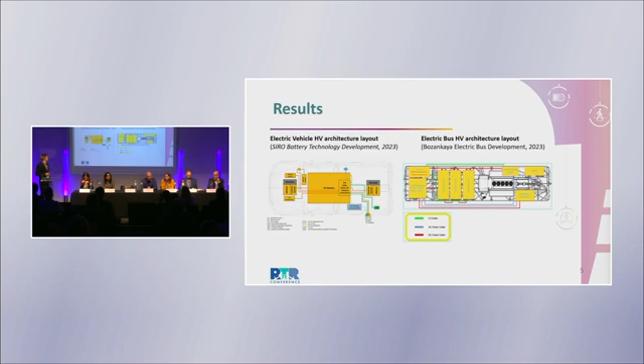I wanted to make it easy because we only have short time, so I will give you an overview of the results. What we first do, of course, when we want to construct our modules for the different use cases, is define a baseline and general requirements. So we looked at different use cases, for example, electric vehicles, electric buses.

Then, of course, we also have to look at the internal components. For example, you can see here for the BMS, the different parts we need, and for the battery thermal management system.

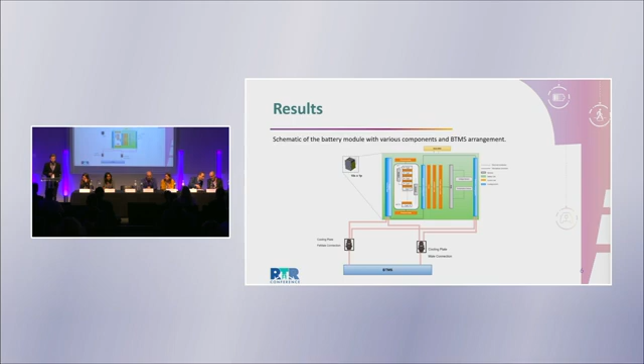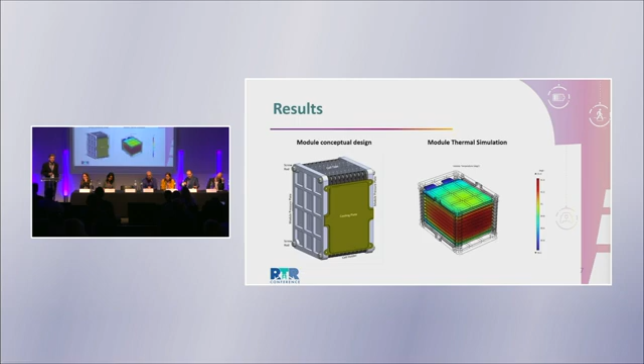At the start of our project, we designed a first conceptual design of the module, which you can see here on the left. And this we will use to characterize this with different thermal simulation and electrical simulation. I just want to give you here some aspects of the different work packages. So it's not only about building these modules, but also to achieve our KPIs.

We looked at different solutions. So one is the electrical solution, which includes wireless communication. So in our different use cases, we will use actually 3 different solutions for electrical monitoring of the cells. One includes the wireless communication, another also includes printed sensors, and one is different in the amount of sensors, also including thermal temperature sensors.

Then other work packages include the electrical characterization of the cell, but also electrical and thermal modeling. So in this case, we really use the data we can get from the characterization of the cell and use it for our modeling system.

And because one of our KPIs is also thermal propagation, we constructed a reduced scale module testing. So of course we don't want to do all the tests on our 3 modules at the end and burn them down. So we built this reduced scale modeling to learn something about the thermal propagation of the cell inside a module. And in this reduced scale module, we also use advanced materials, special heat spreaders, and heat shields.

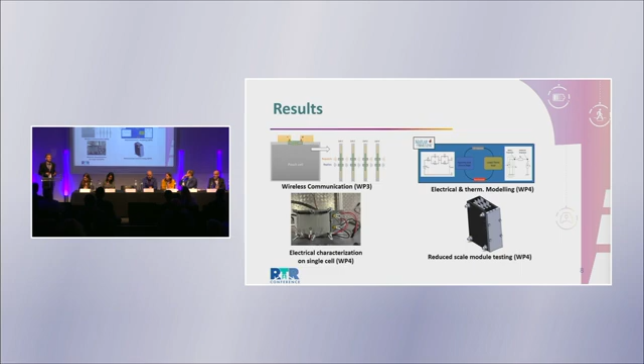Here you can see other aspects of our work packages. So in the last months, we made progress. We updated our design to use more cells. And then we will use this module design to define certain virtual use cases. As I mentioned earlier, we have the 3 use cases for the modules, and these use cases are connected to energy storage, EV, and also buses. So there we discuss this by virtual use cases. We also performed abuse tests on the cell, which we will use for our modeling.

And another work package is the identification of the key exploitable results. So as mentioned today, in the innovation chain we have the 3 pillars. So actually we use a technology from pillar 1, which is semi-solid state batteries, and we go into pillar 2, and we also want to know what is needed to bring the TRL level at the end of the project to higher TRL levels. And that's why we identified key exploitable results which are important in our project, which we then discuss in detail.

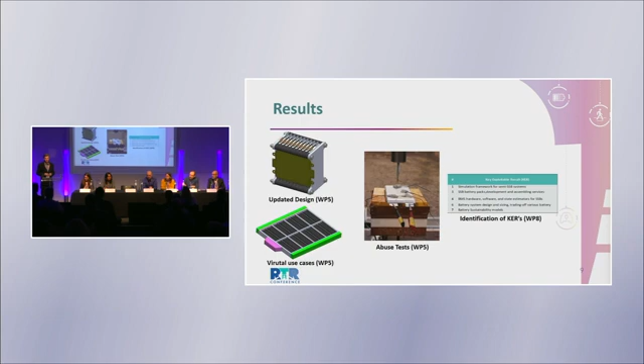Another work package is, as I mentioned at the beginning, we don't only want to build the modules and estimate the parameters of the use cases, but we also want to know about manufacturing cost, recycling, and that's why the LDF-X methodology was developed, which is in fact a life cycle assessment study in which we will bring information from our project. This will also be compared to literature values, and we will also bring use cases from our industrial partners. So from BMZ, we will give an E-bus use case, which we will compare here to show that this approach with our modules has high recyclability and good dismantling properties.

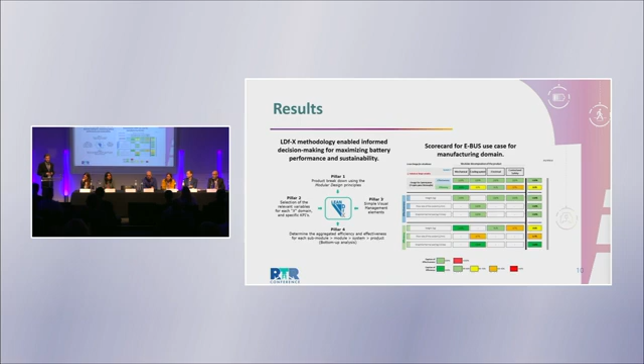Okay, then I already come to the mid and long-term expected impacts of the project. So what is yet to come? Our goal is to build the 3 demonstrators for the 3 different use cases. We will use different materials which are suitable for the different use cases. We will apply different workloads connected to the different use cases, and then we can test our modules. Another goal of ours is to have 3 workshops, which are all planned for this year, and this is yet to come.

And the last aspect is what is important here for the EU, how to disrupt. So we want to further optimize the semi-solid state battery system, but also the solid state battery, which we had at the beginning. As I see the project, it's also an important task to show what are the benefits and drawbacks of solid state battery technology and compare this to lithium-ion, but also semi-solid battery systems for the different applications.

We want to evaluate how we can scale up the capacity of manufacturing. And this will be one of the big challenges. Of course, we can also do this only virtually and by this life cycle assessment. And then we want to develop sustainable recycling and second life solutions for semi-solid state batteries.

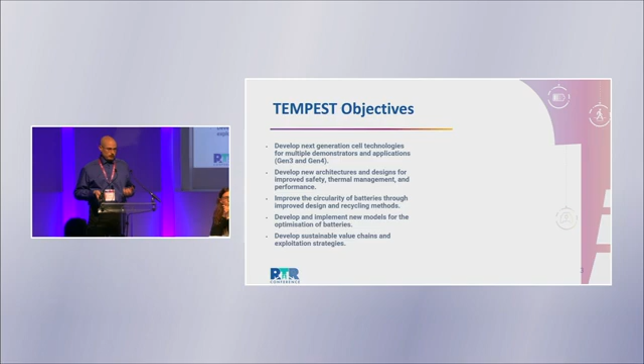Again, we want new architectures so that we can optimize space and weight, but also to improve circularity through better methods for assembling and disassembling at end of life, recycling the materials, recovering the metals, recovering the graphite and reusing it, and using new models to optimize the performance and the mechanical behavior of the batteries, and finally to develop sustainable value chains.

And one of the things I want to point out about this project is we are unique amongst the projects presented today in that we use composite housings. And this itself has been one of the challenges, but also one of the technological opportunities here.

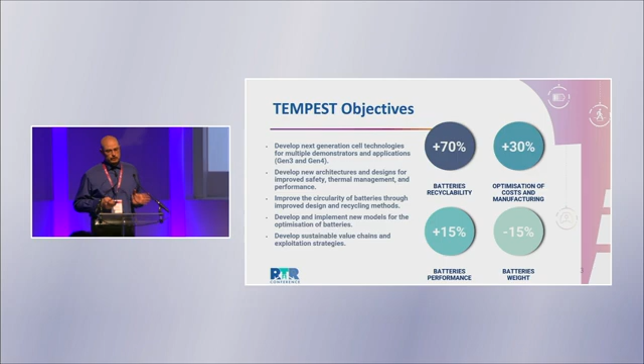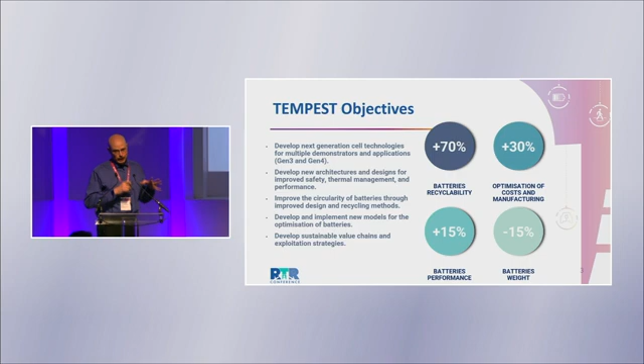So our overall goal is to achieve at least 70% recyclability in the batteries. We want to reduce the cost of manufacturing by about 30%, increase the performance by about 15%, and reduce the weight of the overall pack by about 15%. For this latter point, we have already been able to demonstrate, at least in the gravimetric cell to pack ratio, that we've completely exploded that. We're at around 80% now. And that is simply by shifting from aluminum or steel housings to composites; we have been able to dramatically reduce the weight.

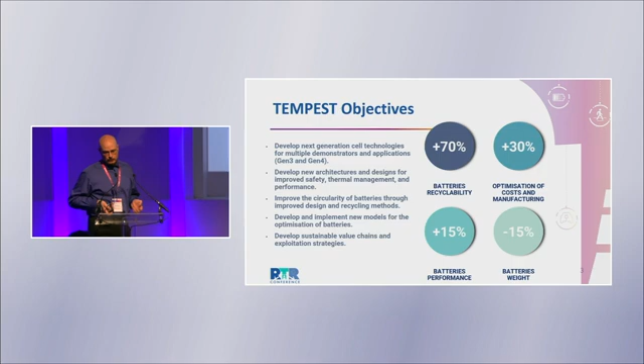So, first of all, in the results, I'll briefly introduce to you the different types of cells we're using. You can see that we have Gen 3 and Gen 4 in here, and we have already started testing and evaluating the cells to establish essentially the data baseline for everything else that will be done. Now, as I pointed out, we have composite systems. These composite systems behave differently from what everybody accepts for how a metal housing is going to behave: crash resistance, corrosion resistance.

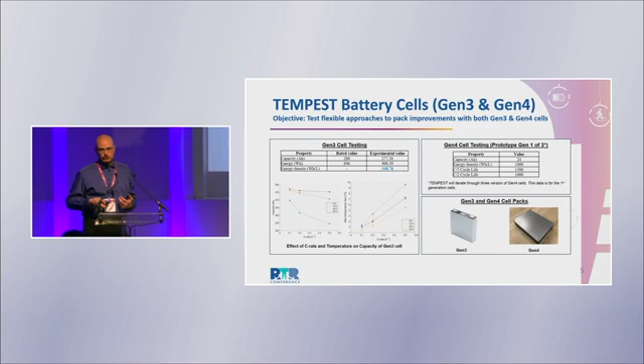A lot of these things change dramatically, especially since we're using composites. So you have to consider, how is this going to behave when it's in somebody's car? So one of the things that we're implementing is a structural health monitoring system.

The structural health monitoring system will continuously monitor the composite system, detect if there is a fissure, and essentially communicate back to the battery management system to tell, for example, the driver of a car, oh, you've got a problem, you need to get it to the service station as soon as possible. So this is a guided wave system that is currently under development.

These are our preliminary results, and what I will point out is that they are currently being refined and optimized to improve the detection accuracy. But the point is, we already have a solid proof of concept to show that we can detect defects, okay? And this will be completely integrated into the pack system at the end of the project.

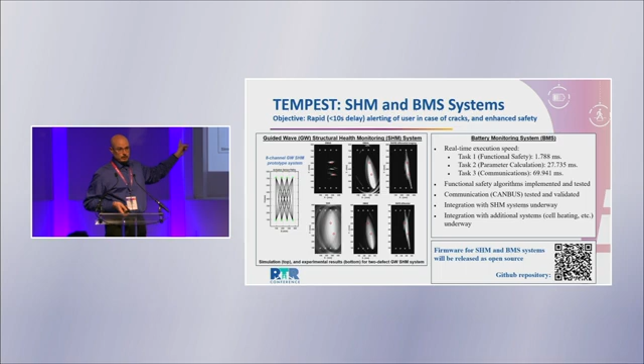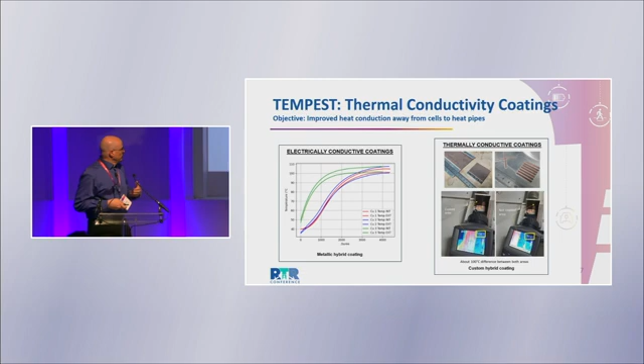The other thing I want to point out is that one of the goals is to be as open as possible. So the firmware for this SHM system, as well as the BMS, will be open sourced, and it will be available soon. One of the other things we want to address is improving thermal management. So we're developing thermally conductive coatings for assisting in transferring heat from the cells to the cooling system. These are deposited by cold spray. These are the prototypes that we have right now.

In addition, we're looking at physical and thermal protection. So first of all, we've done modeling already to evaluate impact resistance of the housing to impacts such as rocks from the bottom. We've also done modeling to set the computational baseline for, for example, the impact of a pole or some other large object against the housing. To complement this, we are working on impact and abrasion-resistant coatings to go onto the packs.

In addition, fire is always a significant issue. So to help address this, we are developing two different types of coatings in the project. The first one is a fireproofing coating for the inside to essentially auto-extinguish any cell fires as they occur. It's a one-time use coating, but it's something that we're currently developing.

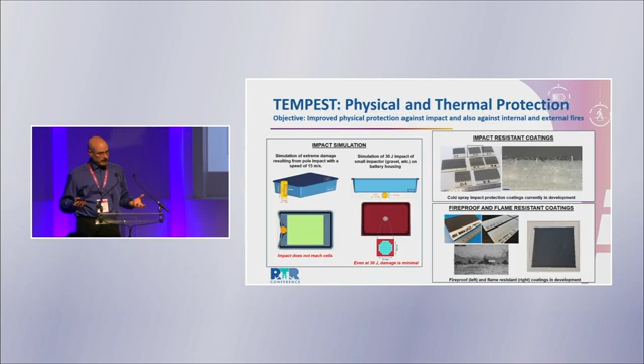The second one is a flame-resistant coating, which is designed to protect the outside. Say, for example, there is a fuel leak in a crash. There's a fire. Basically, what it will do is swell up and protect the housing. So it'll give it that much more time to resist the heat.

We are also looking at circularity. One of the things that's also important is at end of life, how do you address this? First of all, through using these composites, we're going towards a composite formulation that is by design more recyclable. Second, we're using debonding on command adhesives, which once they're deposited have a very strong strength. But at end of life, simply through the application of heat, they become very easy to debond. You can basically just pull them apart.

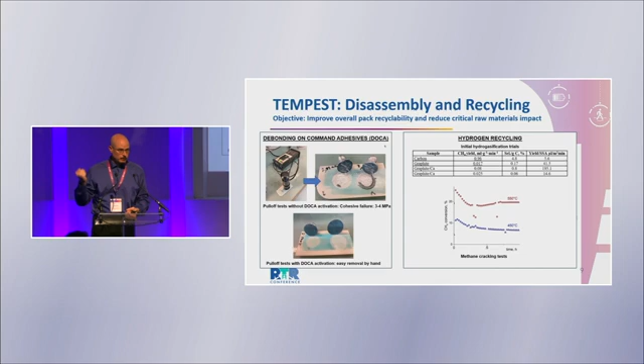Once you've got these apart, the most important thing, the critical raw materials aspect, is something that needs to be addressed. And that is the next thing we are addressing, through methods developed by the National Institute of Chemistry. We are looking at methods for using hydrogen routes to both recover and transform the graphite, as well as to recover the metals. So the idea here is to have a circular pipeline for recovering the materials at end of life.

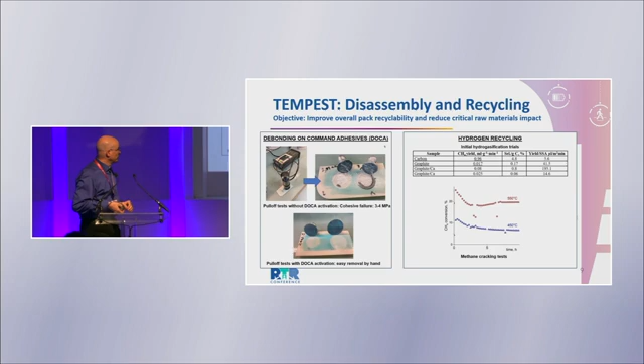So what are the mid to long-term expected impacts? Well, there's a lot to unpack here. First of all, we want to address the volumetric cell-to-pack ratio and the gravimetric cell-to-pack ratio. Now, the volumetric cell-to-pack ratio you can improve simply by getting rid of modules. That's one of the easiest approaches. And so we're using a cell-to-pack approach to address that.

Second, the gravimetric cell-to-pack ratio. That's commonly one of the more difficult areas to address. In this project, as I said, we've addressed it in large part through moving towards composites. That's given us a huge boost in weight savings.

I haven't talked about it here because we haven't gotten to it yet in the project, but we are going to develop a system called energy storage as a service. I'm not going to go over it in detail here because it will take me a while to explain. But the basic concept is to introduce new economic models for the supply, the use, and the recovery, and essentially develop a circular economic model to encourage both manufacturers and users to participate.

We are also going to engage further with the JRC to help work on developing new standards, work on new policy. And we are also in the process of developing training programs for upskilling. And as mentioned before, I'm the chair of the EU Ingenious Cluster, so I will be happy to address any questions for that. And finally, I want to talk about circularity.

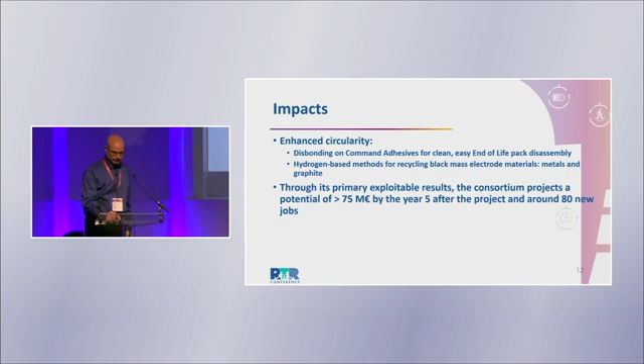Thank you very much, Jeremy. I have to put down, I'm a bit shorter than you.

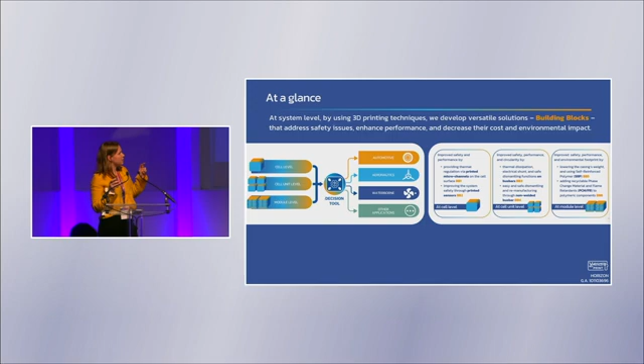And a bit more in detail, today I will not present you all of the building blocks. When it's called BB, it's building block. I will present you just some of them where we have interesting results. So at cell level, just around the cell, we develop the building block 1, that is microchannels for an efficient thermal management and to cool down efficiently the cell.

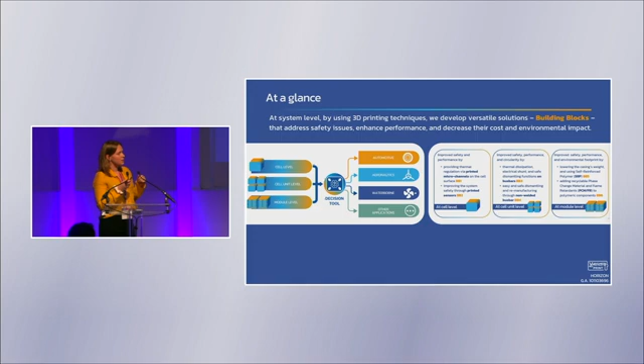And we 3D print this cold plate in silicone directly at the surface of the cell. I will also present you the building block 2, that are sensors that we also would like to print directly at the surface of the cell to sense temperature and detect hydrogen.

At cell units level, it means to connect different cells together. We mainly worked on bus bars. And I will present you some interesting bus bars that we developed, non-welded, that are easy to assemble and disassemble. And at module level, we work on lightweight material for the casing and also on an exhaust gas management system to drive the particles and the gas out when there is a thermal runaway event.

Here you can see the KPIs, so the objectives we have in our project, and you can see that they all target and try to answer the challenges that batteries are facing today. So they are aiming at increasing the safety. We have talked about it before, that we have problems with thermal runaways, for example. So we do have technologies that try to increase safety, to increase performance, to increase lifetime, and the circularity, working on sustainability of the technologies we develop, while trying as much as possible to reduce the cost.

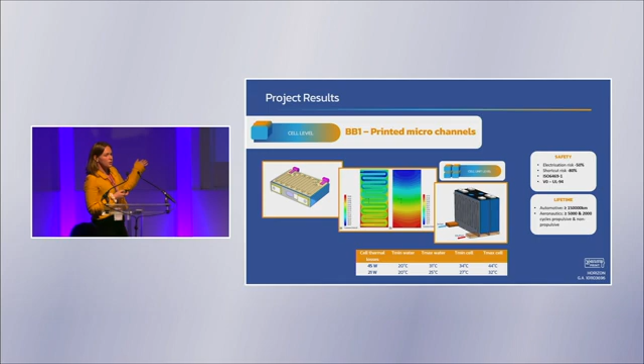Now, going into the details and the results we can present you today after 18 months. We developed, as I said, the building block 1, that are microchannels that you can see here on the left. It's a silicone plate that we 3D print directly at the surface of the cell, and that cools down very efficiently the cell. And what is interesting to see, here you can see the thermal losses at 1C and 3C, so with heat generated, and we can see that we are keeping the cell at a very nice low temperature.

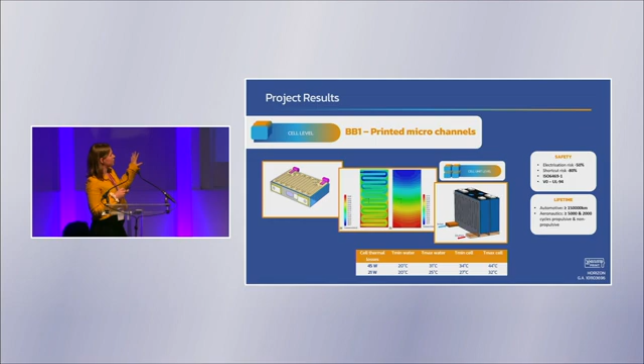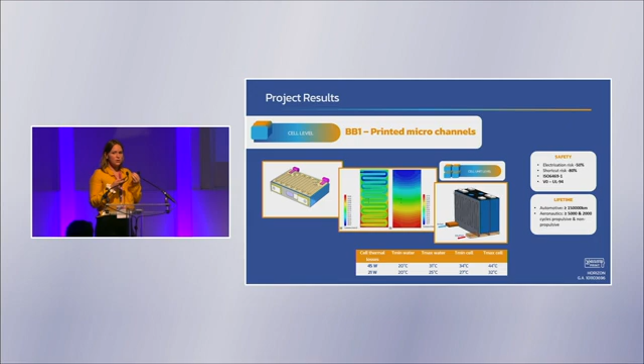And these building blocks will have an impact, so increase the safety, because it will delay the thermal runaway event by cooling down efficiently the cell. And it will also have an impact on the lifetime, because the conditions around the cell, so the temperature, the pressure, and other conditions, have an impact on the lifetime of the battery. So it increases the performance and the circularity.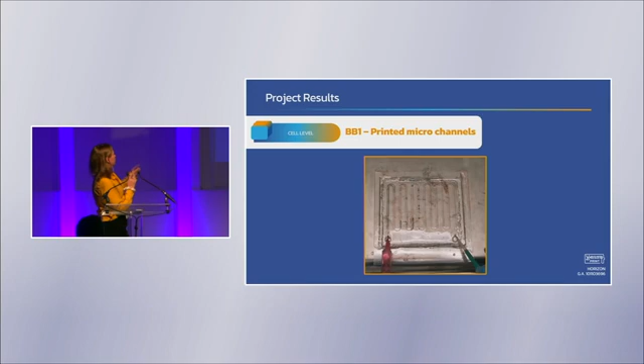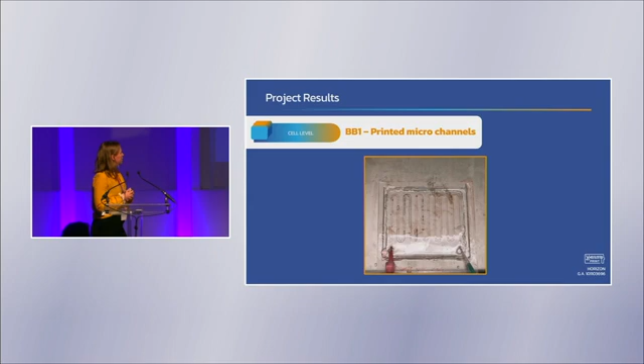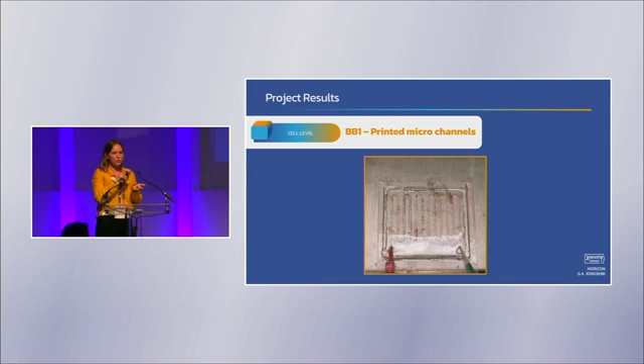Okay, it's starting already. So it was actually a few months ago, so now it's much more optimized than this, but it's to show very quickly the fluid that is circulating very nicely with no losses, no mechanical losses during the flowing of the fluid. And this we will print. We are actually printing right now directly at the surface of the cell.

The second building block I am sharing with you is the sensors. So these two sensors have been developed, are still being developed in the project. They are having an impact on the safety, because we want to prevent thermal runaway or to detect it. So the first one detects the temperature directly on the cell, and the second one is to detect hydrogen, which is a gas that is produced when there is a thermal runaway event. And both these sensors have been developed with water-based inks that make them more sustainable than commercial sensors.

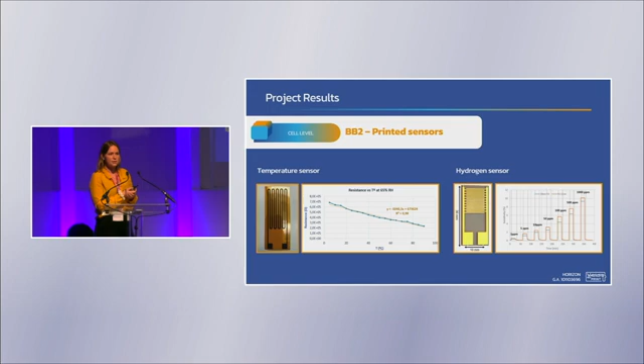We can see for both of them a nice linear answer. So for the temperature, we can see a linear decrease with a nice slope that makes the sensor sensitive in a range of temperature of 0 to 100 degrees, but we do face challenges. We are still working on it. We face challenges in the negative temperatures. And for the hydrogen sensors, we can detect very low amounts of hydrogen, so it's very precise. And we are also still working on it because we face challenges here in the response time.

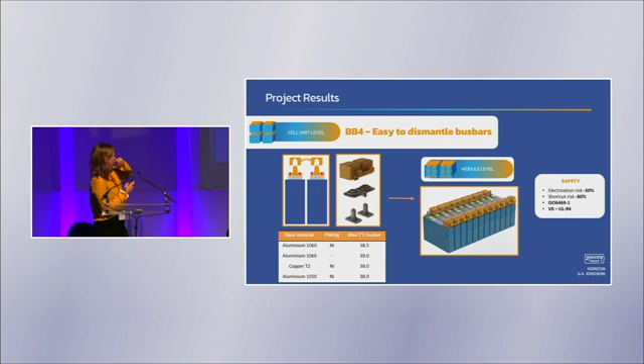And another building block, at cell unit level, it means when we connect cells together, it's building block 4. So that is an easy to dismantle bus bar that is non-welded. So you can see the principle of this bus bar on the left here. We have this lower part that we weld directly on the cell, and then we only have to connect and clip the two higher parts on top of this welded part to connect the cells together.

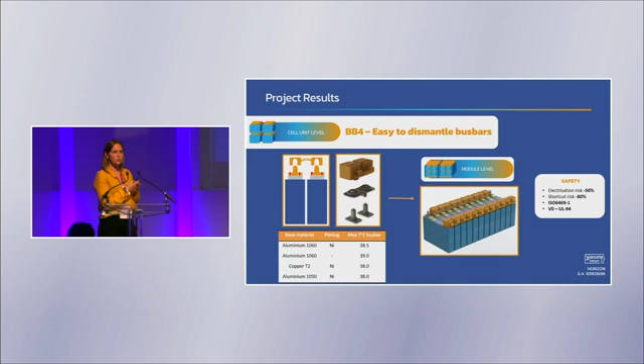And the last building block I'm showing you today is building block 7, which is at module level. Considering, for example, the left scheme, you can see 12 cells together. It's a system that connects all the exits of the cells so that when there is a thermal runaway event, it collects the particles and the gas that come from the thermal runaway and drives them out of the system in a precise location, while also reducing the temperature of the exhausted gas and filtering the particles.

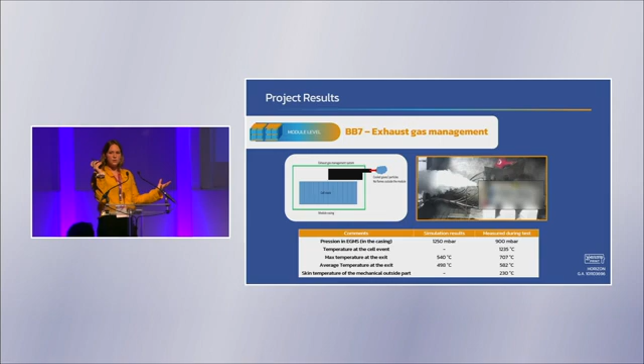And this can prevent the gas mix that comes out from catching fire. You can see on the right the test we performed by overheating a cell. You can see the heat gun, and you can see the gas coming out in a precise location. So the gas didn't come out anywhere in the casing, but was driven to a precise location outside safely. You can also see that it doesn't catch fire, thanks to the pre-filtration of the particles inside the system.

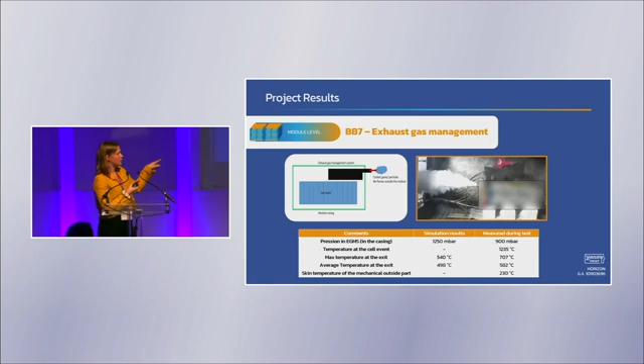And what is interesting to see in the results here is that the measured temperature at the cell where the thermal runaway happened was 1,200 degrees, and the temperature of the gas that came out was divided by 2, so 600 degrees. We actually have even better results now, but it's already a very promising result.

Now, all these building blocks and technologies we are developing in VERSAPRINT are answering the targeted objectives of the European Circular Economy Action Plan of 2020. Mainly, we are trying to increase the lifetime, to reuse, and to make it easy to disassemble and assemble, so to ease the processes at all phases of the technologies. We are also working on eco-design to lower the environmental impact of our technologies. I will show you a little more about this in a second.

VERSAPRINT also contributes to implementing the conclusions of the European Council, mainly developing versatile solutions, as I said in the beginning, for different transport applications. So we will be able to use different technologies for different applications. Also decreasing fossil dependency, improving health conditions, and increasing performance and safety while reducing costs.

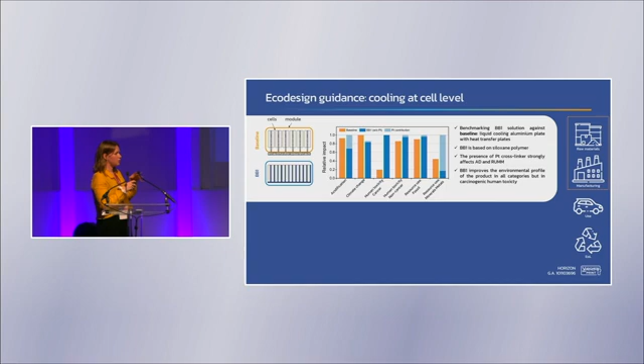And I'm happy to share one result with you. We obtained more, but due to the time restriction today, I'll just show you an example for building block 1, the silicone cold plate that we 3D print on the cell surface. We compared it with a classic metallic cold plate, in orange, and the building block 1 we developed is in blue. Here I show you life cycle analysis results only for the production phase, so raw materials and manufacturing.

What we can see is that we don't have better results compared to a classic solution for the production phase. It's also interesting to see that we have a big impact in the stripes here, which show the platinum contribution. In the silicone we used, a very small amount of platinum was used to make the silicone, but it actually has a big environmental impact. So we need to find another process for the silicone we are using.

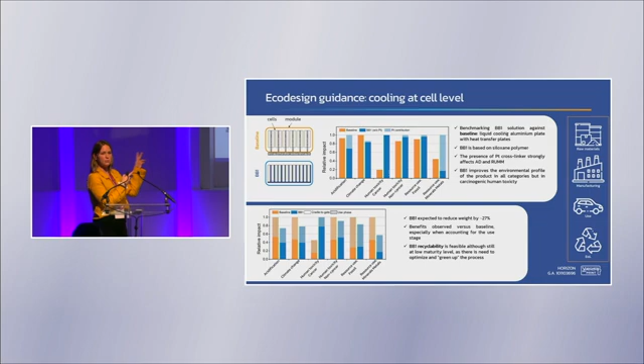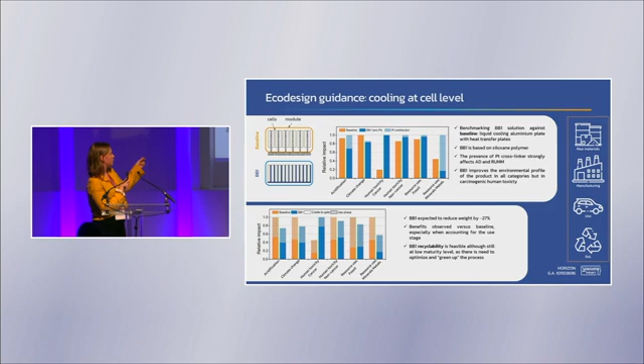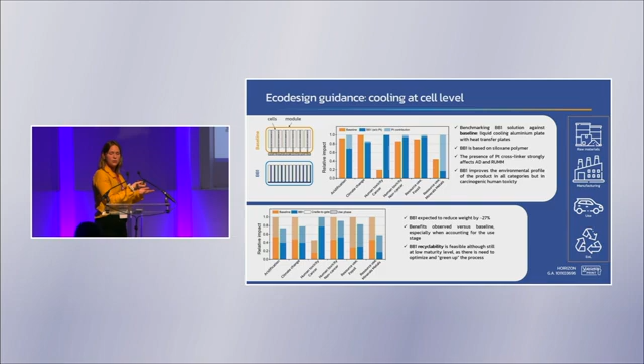But when we take the use phase and end-of-life phases into consideration, not only production, we account for the weight reduction compared to a classic solution. We have a lightweight material, so less consumption and less environmental impact. And this is what we see in the results: for some of the impact categories, we see lower environmental impact for our technology. We have done this for all the technologies we developed, to assess them and try to make them better than classic commercial solutions.

I have other results. If you want to talk about them, don't hesitate to come to me, and I will jump to the conclusion.

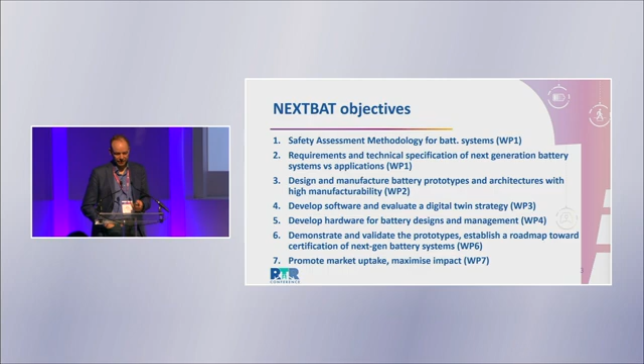Number 5, hardware for battery designs and management. I'll get back to that with a bit more details on the hardware. Demonstration, validation of the prototypes, and through the prototypes also the design approaches, architectures, concepts that we're working with. And of course, lastly, promote the market uptake, look into the diffusion paths, how the bigger picture looks in terms of batteries being deployed into various segments. So that's the setting. And now let's just delve into some of the highlights or the chosen results where we stand at the moment.

We set out to look into technology from the battery cell, being, of course, a key component of any battery system. So we need to understand sourcing cells, analyzing cells from the market. We were aiming at solid-state battery packs or modules, struggled a bit to find solid-state batteries from the market, and I think this has become quite clear for many actors here. So we made a compromise, as we heard also, using semi-solid-state cells, and this is kind of in between there. We want to push the specific energy towards 300 watt-hours per kg at system level later on. We will not reach that in NEXTBAT here, but we still want to analyze what that kind of technology will mean from the battery system level side.

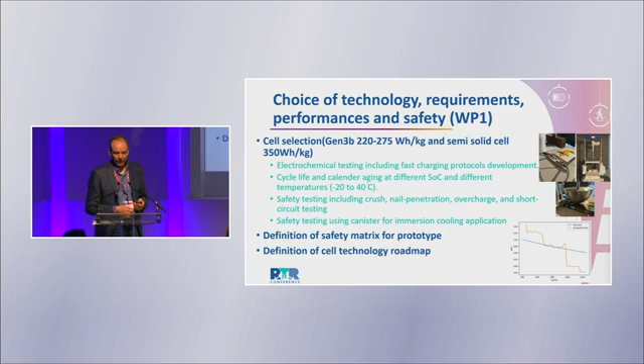So there was generation 3B, more or less in the domain where the technology is at the moment, and 350 watt-hours per kg is the semi-solid cell track for the prototypes aiming at higher energy density. So we've done various electrochemical testing, fast charging, cycle life, calendar life, aging, various types of quite standard testing. Safety testing at cell level, I'll get back to that a bit later in the slide deck. Safety testing with a canister. We're working on immersion cooling at the second prototyping track, a bit more on that shortly. Safety matrix for testing. Now we work at the cell level, but later on the safety validation and testing will be pushed up to module level. And then the cell technology roadmap, as we know that there will be a lot of developments coming up.

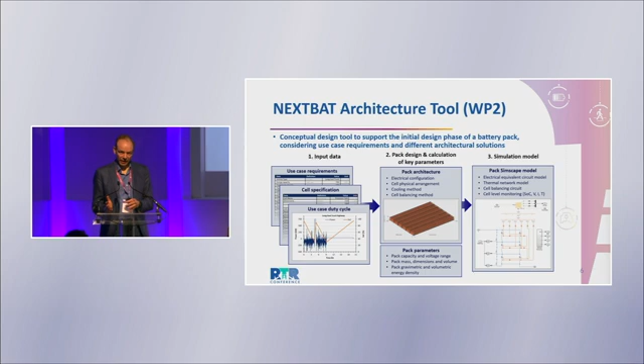Another big one, from another work package here, starting top down on design tools, how to approach the system architecture, system layouts, and there will be various combinations of these. So we have put up a library of duty cycles from the different types of road vehicles and others, conceptual design tools to take into account thermal design aspects, electrical architecture aspects, cell performance, duty cycles, and various configurations. Excluding mechanics, because we are not reaching TRL5 to really do mechanical packaging of packs. But this gives us a solid background to really work around the different concepts for technology and systems, and also place the different innovations that we're working with into the analysis framework.

A bit more on the prototypes. As said, 2 prototyping tracks. One aiming at high energy, so using the semi-solid state cells. Let's see how to get back here. This one, good. This is for prototype 1. It's not a design-frozen module yet, so we'll stay at module level, 48 volts, 14 cells in series, 1 in parallel.

Packing of those, liquid cooling, BMS, and then packaging that at the module level, whereas prototype 2, we push the power density to a higher level, and including two innovations here. One is the immersion cooling system.

So what is not shown here, we're also working on the casing because we need a pressurized system, and it's also fiber-reinforced plastics combined with joining with aluminum, and I think then the reference will be maybe a steel casing or aluminum casing there. So that's the weight reduction element there.

A second innovation there will be cell level monitoring, EIS, for advanced diagnostics to really work on safety related state of temperature, for example. And then we have a maximum effective thermal management system to control that and really to be safe, not to run over into the thermal runaway side.

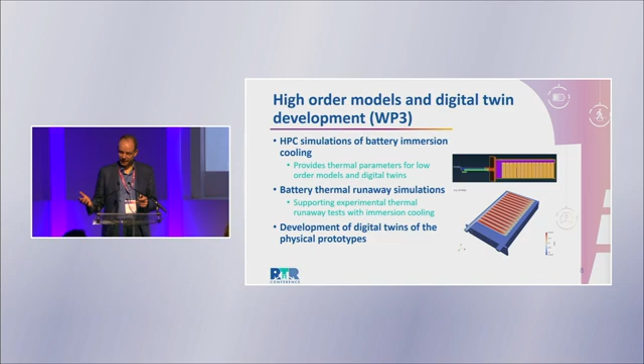We also have a number of physics-based models training AI surrogate models for cells for performance degradation and so on, and that also will be leading, once the final design of the prototypes is fixed, to digital twinning of those and matching that with the test sequences, validation sequences, both normal operation and then the safety.

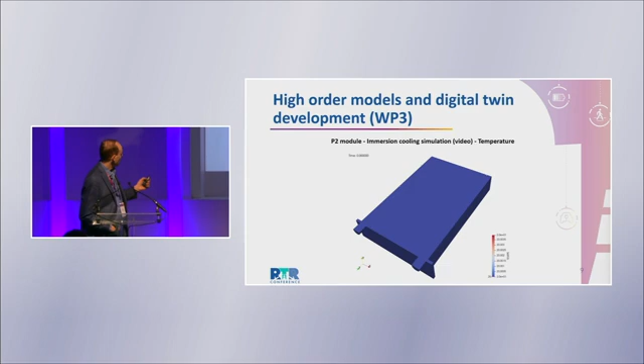And now let's see how the, it's a simulation video here. I'm not completely sure how to start it. Yeah, it does. So just showing this is prototype 2 and seeing a sequence of the thermal flow and how the temperature gradients develop as part of the design space.

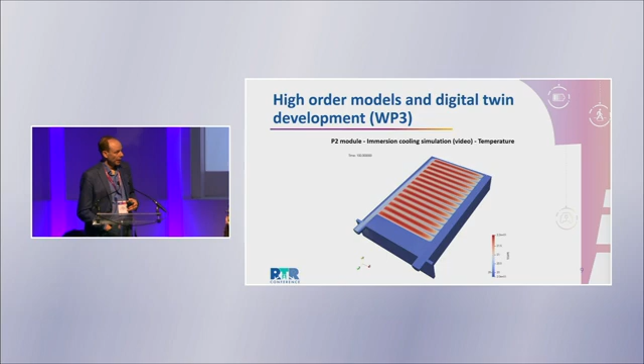We also have done a sub-element like cell level simulation, choosing the dielectric oil and some of the elements there. And I think this is done. There's another one, fluid velocity, that was the temperature first. So this is also validating at this stage when we're finalizing the designs of both prototypes. This is on P2 on the thermal side.

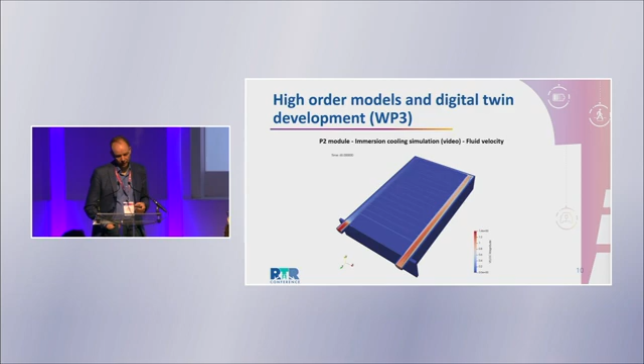I believe it's maybe, yeah.

Just a couple of words on the cell testing. So I started with the cell selection. We've looked into available cells, and we'll be following the roadmap type of approach later on, as part of the comprehensive safety approach. There's an inherent safety of the cells. Then there are intermediate subcomponents like thermal barriers, thermal management, and the management system as a whole, and then the structural elements and so on. So this is part of the inherent part, internal of the cells.

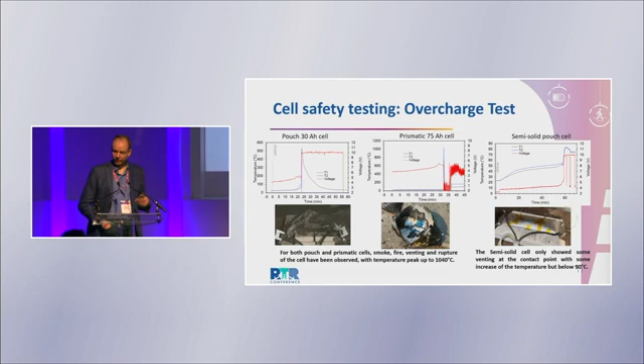So we've done destructive testing on all of the cells that have been in the matrix for screening. And later on, when the prototypes, 2 of each design, will be manufactured, they will also go to the safety validation and testing during the second period here. And then this is the last result I picked up.

We're working on the battery passport, like usage analysis, and this is also supporting the LCA, life cycle assessment, life cycle cost analysis. So using the recently published regulation or standard on the battery passport, how to utilize the data,

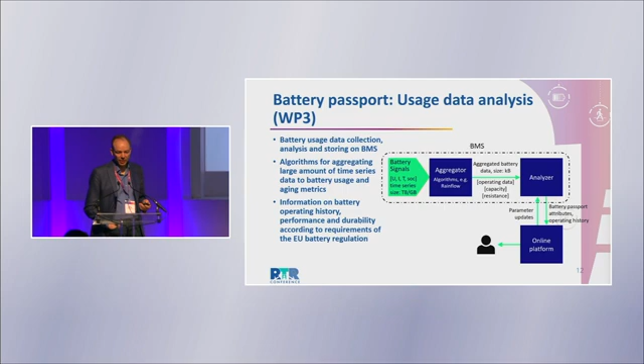and this is linked into usage profiles, and also we expect with the digital twinning and the laboratory experiments really to bring specific information and interface this also with the BMS, which is of course an integral element of the safety approach as such. Just a couple of words to conclude here on the impact side.

A funnel to create impact. This is also our internal process that we follow, identifying the key results. Of course, this is what each partner in the consortium is working on. Right now, we look internally into the business innovation potential, and later on this will lead to the business plan and also creating the individual exploitation tracks.

And currently, as said, we are more or less, as we delve deeper still into the actual innovations that we work with, charting out the individual tracks. And then on the mid and longer term benefits, contributions to EU policy and so on.

So of course it will build on the tangible results, outcomes, exploitable results, and then contributing to the roadmaps, creation of a longer time view, advance in safe battery technologies, and specifically bringing the innovations towards the more application-oriented higher TRL work.

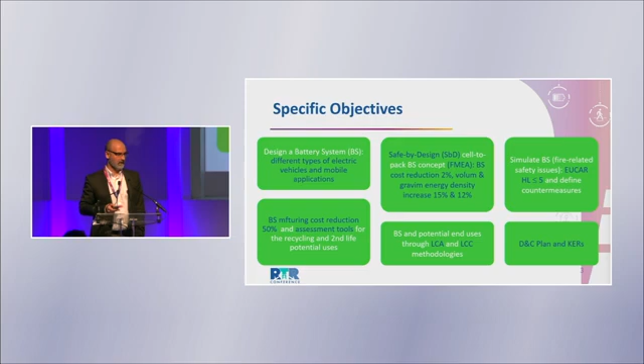So regarding results, I just focus on the results where we have some progress that we can show. As I said, we have just started 1 year ago. So the first challenge was to define even the drive cycle, because in the automotive sector we have the WLTC, formerly we had the NEDC, but in these segments, off-road, maritime, and Second Life, there is no specific standard profile so that it could be compared.

And this was something that was also highlighted in the workshop, that, by the way, I highlighted there. We collaborated thanks to the EU Ingenious cluster together with the JRC, BEPA, and 2Zero. And in that workshop, one of the things that was highlighted is this lack of information or guidelines for this, as well as guidelines about safety and about abusive tests to be applied to this kind of vehicles.

I take this chance to remember that here we will try to do some standardization activity on these fields, drive cycles, safety means that we are introducing in the design, and that is why we participated in this workshop, and we are also in contact with the EARPA.

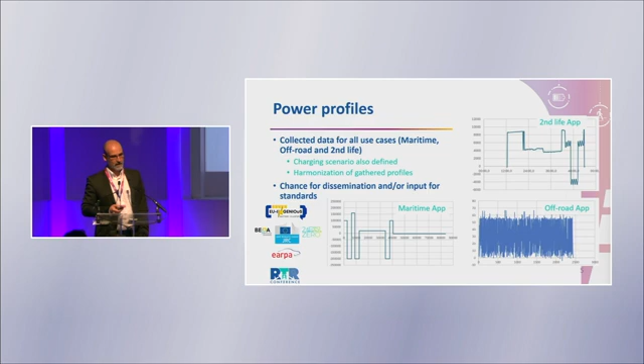Another result is based on impedance spectroscopy, which we are trying to use to assess the quality of the weldings between the bus bars and the cells. I did not mention it, but you will see in the pictures that this project is about cylindrical cells. 21700 was the baseline defined by MIBA battery system, but this project is about 4695 cells, these thicker ones. And the technology, by the way, is advanced NMC.

So here we realized that with some samples related to the 21700 thin bus bars, we could not see any difference between a high quality welding and a bad welding. But in December, when we started to create samples of the new bus bars for the higher current of these 4695 cells, we could use it as an element to assess the welding of this bus bar and cell.

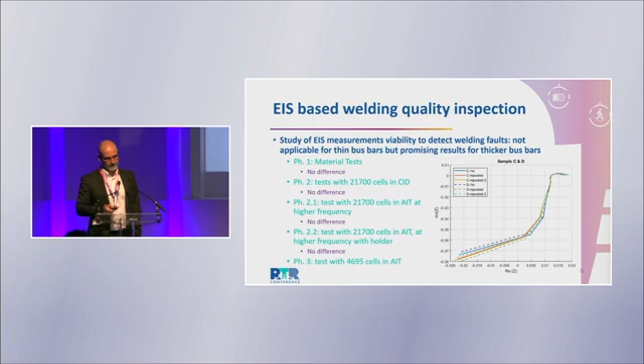And the idea is to implement this in the production line, so that this could reduce the cost and improve the production. So this is something that we are working on. It's a work in progress. This is one of the important milestones that we have.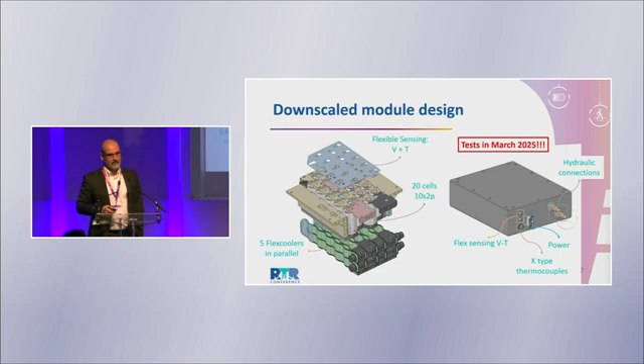As it was mentioned by some of our colleagues, the plan was also to create a downscaled module design, so that we can do some iterations with respect to the simulation that we are already doing. So this is such a downscaled module. We are now assembling this. The colleagues of MIBA are going to assemble this, and in March it will be tested at CIDETEC, and there will be a deliverable, and this will be a good reference to be compared with the simulations that we are running. It is likely that we will produce another one during the year to go on with these iterations.

On the other hand, on the electronic architecture, the goal is to build a wireless BMS. There is already a master-slave structure BMS that has been successfully tested with quite a low power consumption. Regarding the cloud communication, basically we are going to improve an existing interface and select some hardware for this cloud communication. And one of the aspects that will enhance the safety is the internal short circuit tracking.

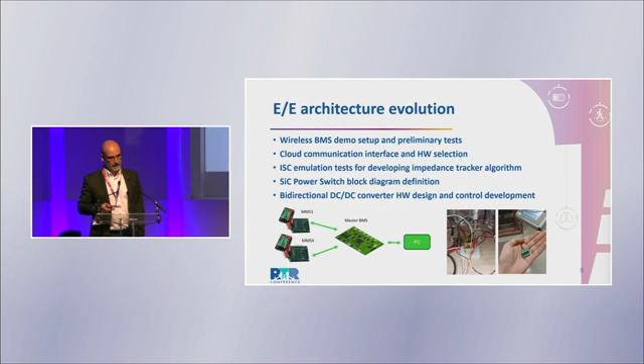This work is mainly done by CIDETEC. We already did this analysis fully on pristine cells, and now we are going to do it on aged cells. So it is to detect the internal short circuit before it happens, or in the very preliminary phase. Another point is to design a power switch based on silicon carbide technology. And VUB is focused on an interleaved bidirectional DC-DC converter, for which they have recently finished a preliminary design.

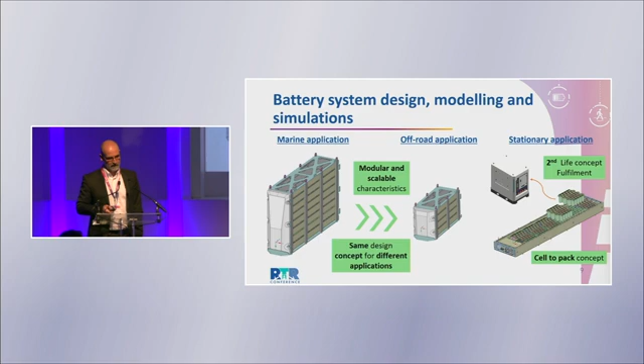So this is about the result. I did not mention that, of course, we did all the cell characterization activities and abusive tests and so on in order to reach 1D models, electrothermal models, that at the moment we are scaling up to 3D electrothermal models that are the ones that we are going to compare versus this experimental data that we will get from the downscaling module.

Regarding that, of course, they are quite generic, because it's the first year, so this is what we expect to get. The idea is to reach the next generation battery system with increased performance and safety for transport and mobile applications. And this could be divided into, as I said, transferring this knowledge to different types of vehicles and segments, and on the other hand, implementing the safety by design approach into the usual R&D process, okay?

And the other outcome would be to reduce, as I said, the manufacturing, refurbishment, dismantling, and recycling cost of the battery system. And this would be done by taking into account these aspects from the very beginning of the design, with this modularity concept, and by proposing an automated disassembly system and a tool to assess the reuse and second life of the battery.

Finally, in the longer term, the idea is to increase the competitiveness of the European battery ecosystem. As I said, the cells are European. The idea of the pack is also coming from one of the European partners. So we hope that we can push this and extend this concept to the rest of the markets and products.